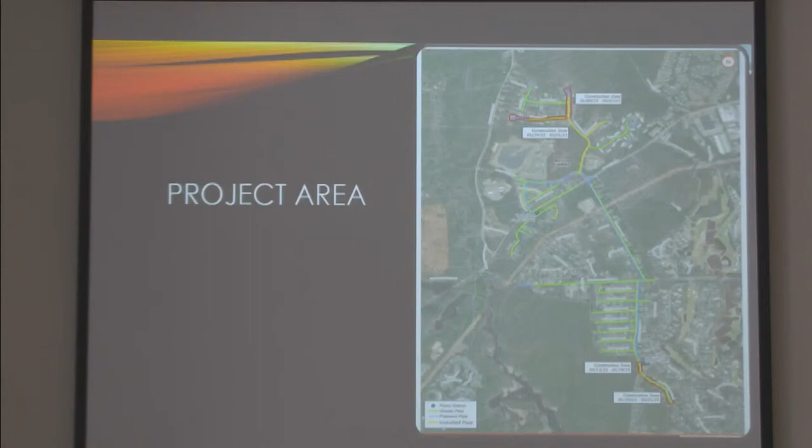This is the sign announcement for the project, which covers all three contracts: the Water Resource Recovery Facility as Contract 1, Collection System North as Contract 2, and Collection System South as Contract 3. All of the entities involved are represented on this sign, which informs the public of the total cost of $53,960,000. It lists Robert Auer, Environmental Partners, Mass DEP, Environmental Protection Agency, and Weston and Sampson, who is the OPM on the Water Resource Recovery Facility. GHD was design engineer for all three contracts and serves as project administrator for the plant, and Waterline Industries is the company physically doing the plant.

Where is that sign going? I'll show you right here. I can't see, where is it? I'm going to get to it for you, Joe.

This is an overhead aerial view of the area for the north. Right at the beginning here on the bottom is the Public Works area that comes off Meeting House. Then you have the solar array up over the old landfill, and the transfer station as it appears today. This right here is the site where the plant is going, and over to the right on Carlton, you see that little red arrow? That's where the sign is, coming off Carlton Avenue on the entrance drive.

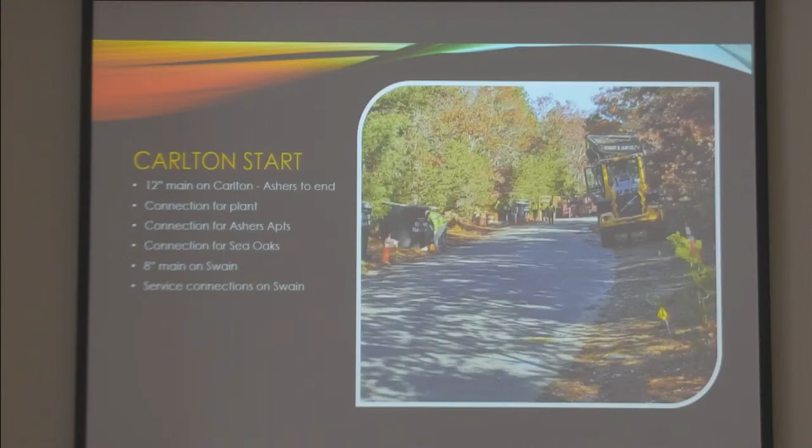The project started on Carlton, working in the vicinity of the plant and then moving north. For the most part, it was a 12-inch main on Carlton, but there's a section from the plant down to Asher's that was 15-inch. They put in the connection for the plant and a connection for Asher's Apartments, which I'll get into in a minute. A connection was put in off Carlton for Sea Oaks, and the 8-inch main on Swain is already in, as well as the service connections on Swain.

Here are some of the materials and equipment for the site. This is a large track hoe installing main and manholes. That little piece of yellow you see is a guy down in the trench, but these are some deep trenches, over 15 feet.

This is a set of manholes that was sitting on Asher's and will be installed, and this is 12-inch SDR main. SDR stands for Standard Dimension Ratio, and it's structurally a bit different from what most people know as Schedule 40 PVC, which stands for polyvinyl chloride. PVC is a very rigid type of pipe, but this pipe has more flexibility, so it's more forgiving in a difficult environment, and it also has greater strength properties. This is the pipe we're using for the project.

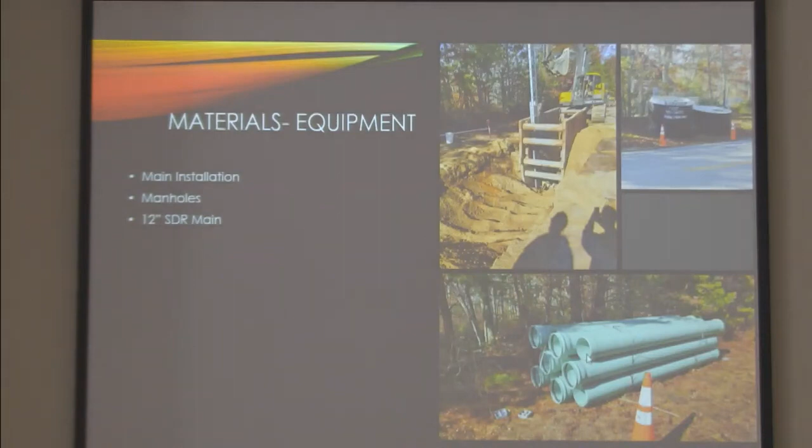Here are some other materials. In the top picture, they're installing a preformed manhole. These are custom manufactured for all the manholes on this project, and they can be in multiple sections, one, two, or three. The middle one is called a chimney—these are concrete structures that sit over a main when it's very deep, in order to make a structurally integral connection with a sewer lateral, because at that depth it becomes very difficult to maintain the integrity of the lateral connection. In the old days they used to pour concrete on all these; now they can manufacture it. Down here you see some materials being stored in an Eversource area right off of Orchard, where we have access and permission to store materials.

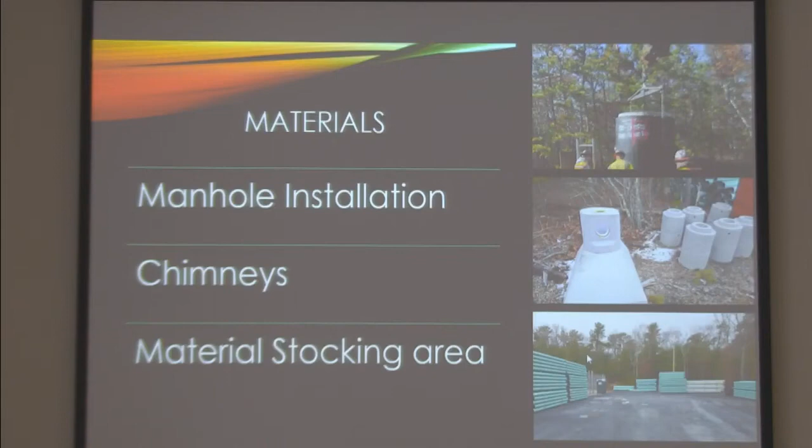These are just a couple of photos to show how deep it can be, with the guys down in the trench—it's a shame the picture doesn't really convey the actual depth. On the right, they're installing a manhole, and in this area they have preformed rubber inserts that go into the manhole to make it a watertight connection.

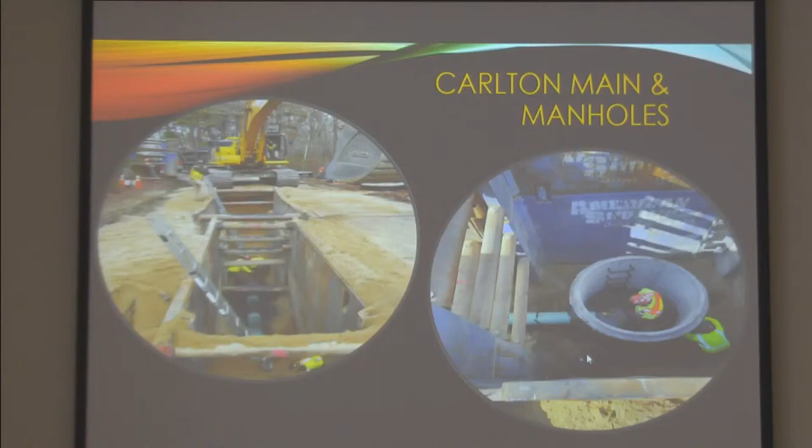Mashpee Neck was just getting started when I put this together, so there wasn't much to show there. On the left, you can see them repaving the trench after putting in the main. On the right is testing a manhole for water tightness—they do that as they go instead of waiting until the end of the project, which is actually very beneficial for us and them.

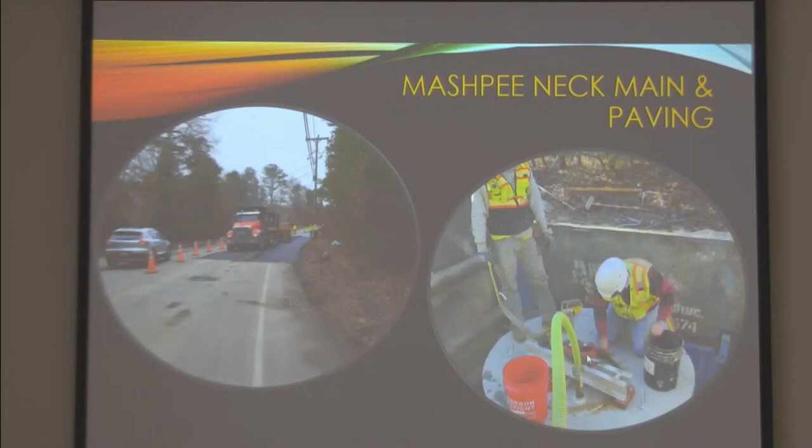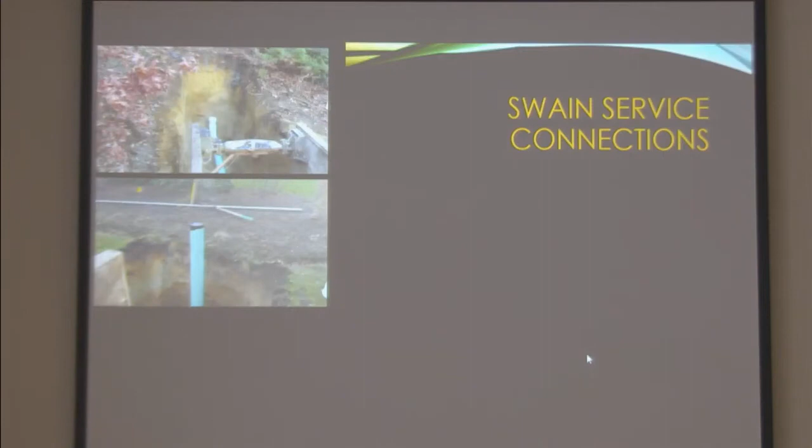What a clean out does, this riser gets installed on the top of that TY, comes up to the surface. This is showing it above the surface. They cut it off, make it flush with the surface, but it does two things, three actually.

One, usually it's visible, meaning that when they're all done with that service connection, you'll see where that cap is. So it tells you where the line is. That's one thing. Another, it allows access to the pipe. So if anything did happen and it did clog up, you would be able to get a snake in there, be able to clean the line.

And third, it's the line of demarcation, so it's installed at the property line between a house and town property.

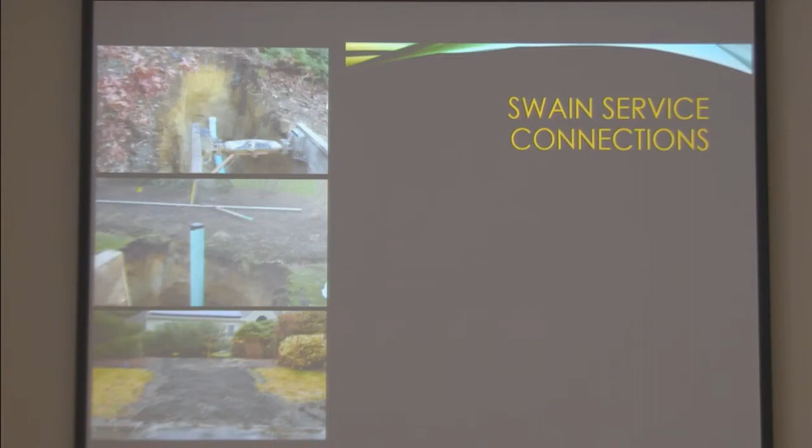And there are pumps down there that will literally lift the wastewater up and then push it on its way to another gravity main and or to a force main going to the plant.

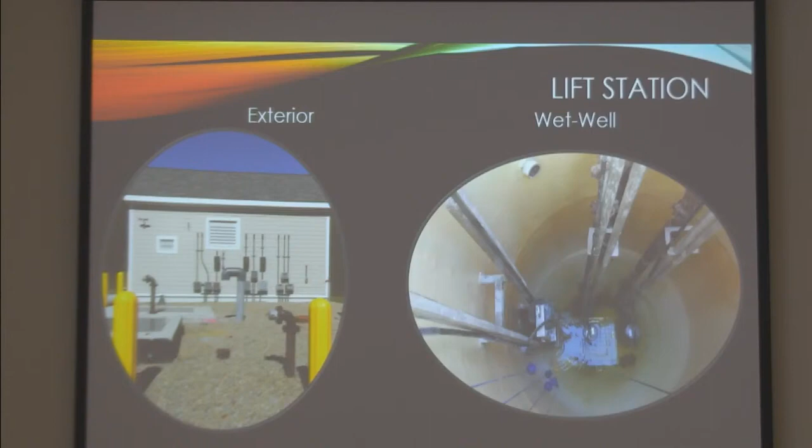Asher's Path apartment, this is the biggest single user on the entire project. They have 56 one-bedroom units in there. I think the design flow for that facility was in the 6,000 to 8,000 gallon a day range, and that is directly across, it's on the southern side of Sea Oaks and directly across from where the plant is being built.

And it's managed by the Mashpee Housing Authority.

These slides here, and there's going to be 6 of them, are really very important for you. This is how I convey to you how your project is going, and you can actually see it as it's happening. So you start out with the original construction contract, $27,905,000. This is for the wastewater resource recovery facility contract. The adjusted value was $29,502,000.

And that's because down at the bottom, you see we added change orders. That was for the additional tankage. So the actual adjusted contract value is now higher than the original value by over $2 million.

So then you have $840,000 is how much has been paid so far on the contract. On the left-hand side, it says completed as of December, 2.9%. There's a couple different ways that you can use a percentage on a contract. You can use it by percentage of time, meaning how much time has elapsed versus how much is remaining in the contract, or percentage of value.

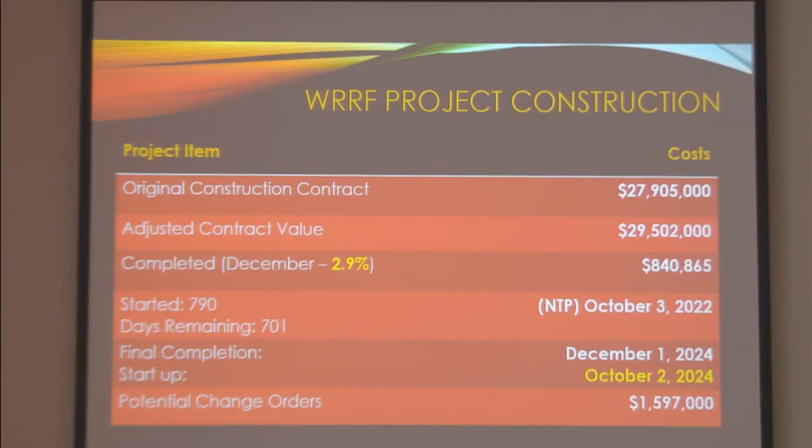And then I'll be showing you potential change orders, as you see on the bottom. Sorry, it took me a while to explain that one. Now the rest of them will go a little bit quicker.

So this chart will become important for you. I've got 3 values up there. You have the original budget in blue, 27.92. The adjusted budget, which incorporates the change orders, basically a legally changed budget value. And then you have the actual expenditure, which in this case is $840,000 expended so far.

What's really important is that those lines should not diverge materially. If they do, there's a problem. So in trying to keep a project on track financially and time-wise, that's what this does. When you start to see a divergence, it means there is a problem.

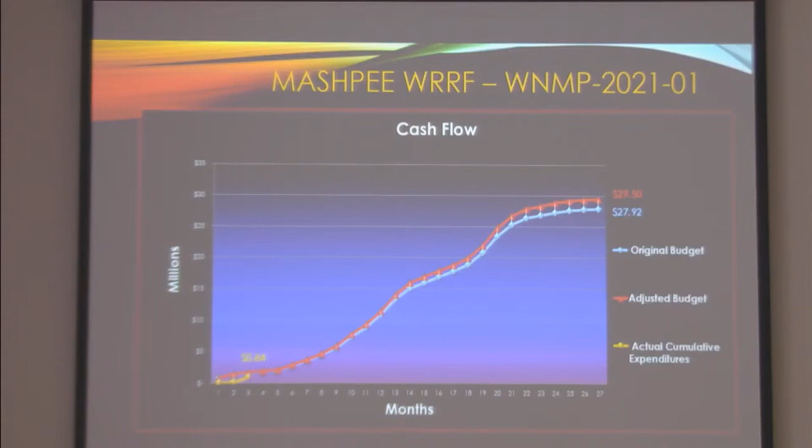Good idea. So on the Collection System North project, this is the smallest of the 3, at $5,024,198. The adjusted value is the same, only because we didn't have any changes to it yet. As far as completed, it's at a 13% level, already paid out $662,000. This one, being the smallest of the 3 projects, had the least amount of time allocated to it for completion, 679 days. There's 590 days remaining from the notice to proceed.

Final completion is anticipated in August of 2024. In my opinion, it's going to be done before that, as well as main completion by July. There are no potential change orders at this time.

This is, once again, a different graph to show you how these lines go. Up here, you can't really see the blue line because the red line's over it, since the values are identical at this point. But they will change when change orders come in. And then you see the actual value here, and there's already some level of divergence between the lines, but that's because this is where the system startup was. At the outset of a contract like this, they'll be ordering a lot more materials than they can bill for at that time.

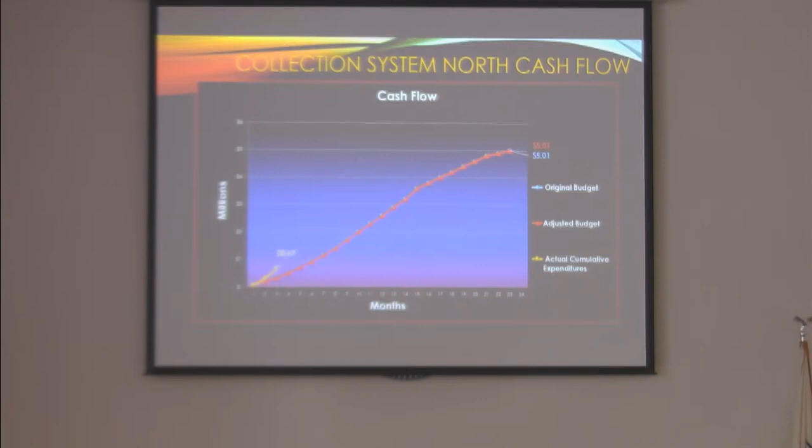Well, that variation there can either be positive because they're ahead of schedule, or negative because they're way behind schedule and struggling with overtime on Sundays. If it keeps going that way, it's a problem.

All right, Collection System South, original contract was $9,806,000. The adjusted value was the same because there weren't any changes to it. It's 1.3% complete as of the end of December because they're really just getting started on this project down here.

Has the same start time clock as far as the Water Resource Recovery Facility at 790 days, 701 remaining. Final completion is expected the same time as the plant, which is December 1st, and main completion is expected by November 1st.

This is the cash flow for that one, and as you can see right now, there's not much to show. It was the last portion of the project to get started, so they really are in the mobilization phase now.

Do these cash flow numbers mean the town has actually paid the contractors or not? Yes, it's paid out, payouts, actual payouts. So upcoming, we're already through January for the most part, so this deals with February and March.

At the plant, they'll be working on process tanks, which means they're going to be digging some big holes in order to put in the foundations for the tanks, and get in the underground piping.

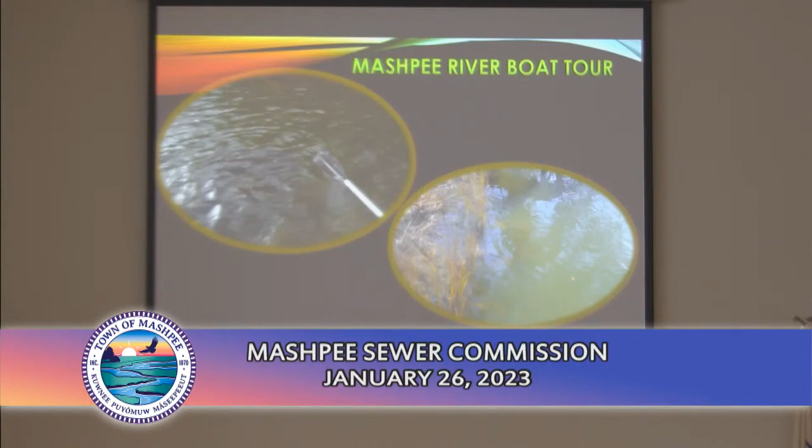So this is just a couple other pictures. This wasn't even 2 months ago that these were taken. On the left, you can see how dark the water is, and that's stirring up the black muck because it's all shallow there. On the right-hand side, you cannot see the bottom at all. These are stones right in here, and you can barely see them, with less than a foot of water on top. So it's not supposed to be like that. The clarity should be much better.

This one impressed me. And one person here knows what that is. I had to ask him permission to put this one on here. Mr. Lyons took this photo, and I love sunsets myself, but quite frankly, it doesn't get any better than that. So I thank you for allowing me, Joe. That's Great River, the river on the east side of Waquoit. Yep, but it was a beautiful shot.

Okay, this is the happy moment here, in that looking at the Mashpee River, it looks pretty on the surface, but it's got a lot of problems underneath. So I wanted to show you real quick a project that was undertaken between Mashpee and Falmouth. Not that we were the lead, the Falmouth Rod and Gun Club was the lead, but nonetheless, I had worked on this with the Rod and Gun Club and other entities when I was director in Falmouth in order to get this project funded.

Their project was $3 million. August 21, it was done. It involved Mashpee and Falmouth and others. They removed an old earthen dam, did a culvert replacement on Carriage Shop Road, replaced the failed fish ladder, and the goal was to take the former Farley and Garner cranberry bogs and restore them to their natural habitat. As part of that, they installed 4 new freshwater ponds, with the purpose of restoration of brook trout and the American eel.

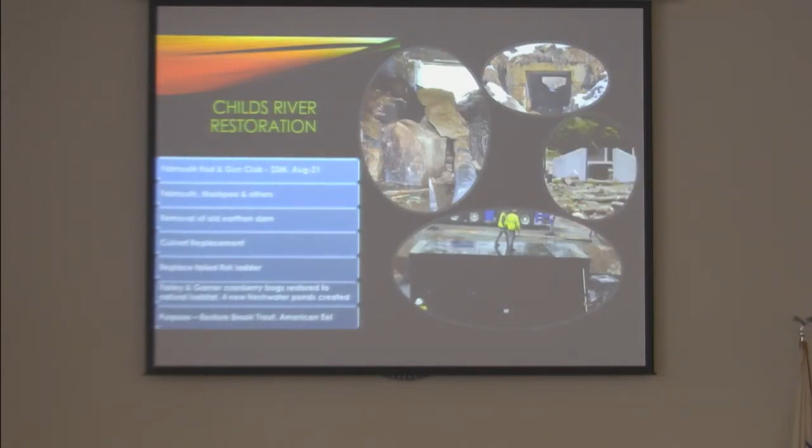Up on the right here, this was the culvert for the Childs River under Carriage Shop Road, so you can see that was pretty much shot. This was the new culvert going in, it took a crane to lift that into place, and that is the new culvert right in the middle. These are the wing abutments for that new structure. Don't expect anybody to read this, but I highlighted Mashpee and Falmouth as part of the contributors, and you can see the list was long.

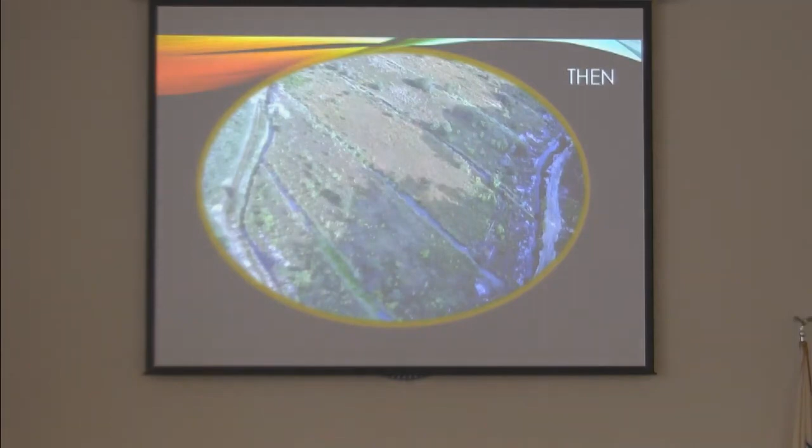And this was a problem. Yeah, okay, it's still going to be a problem. So I'm going to go to this other one. But hold on just a sec. It's a full feature film. It's actually all of 30 seconds long.